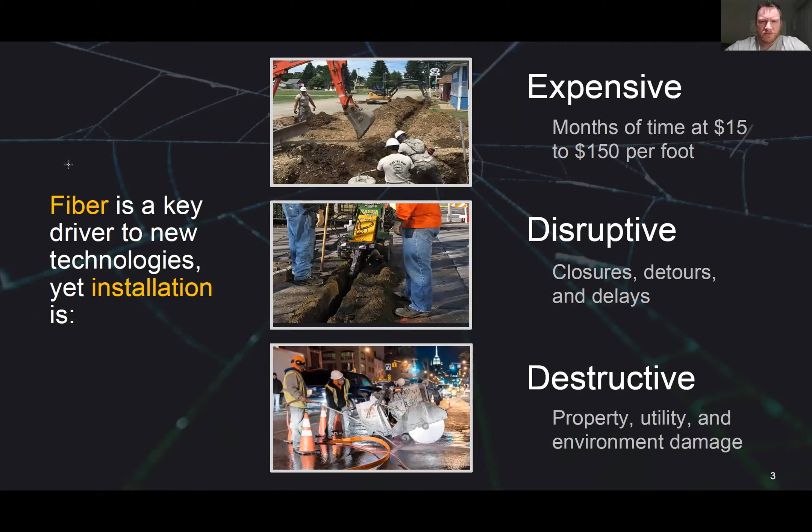So what a lot of heavy contractors do is trench the ground, or cut into paved surfaces, and the property has to be restored after the cables have been installed. This can be a very time-consuming and expensive process, and it can be damaging to underground utilities, rights of way, the environment, and even the flow of traffic and everyday life. Those are the types of things we're trying to avoid. So we developed FiberTRAX.

We're essentially painting optical fiber onto hard surfaces or paved surfaces to bring data connectivity and broadband into hard to reach areas. The hardscape surfaces, like asphalt, roads, and sidewalks, were typically the most challenging portion of a network to install, because there are a lot of underground utilities, and when you cut into the road, you really don't know what you're going to get. You can survey and do different techniques to understand what's there, but a lot of surprises happen once we cut into the road.

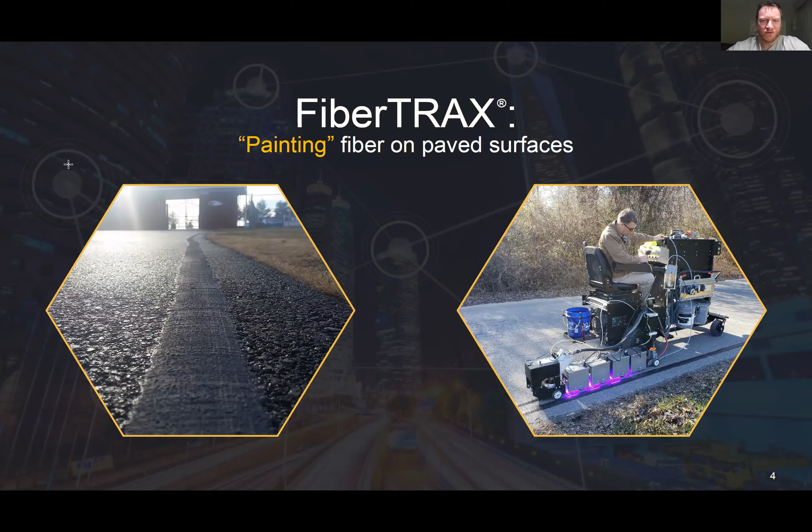So we're really trying to make it simple and easy for installers and contractors to install cable, and we're trying to get another tool in the tool bag so that when they go out to do installations, they can use this as another method, another technique. We think about it as an on-demand solution for fiber installation, where you're not cutting into the road surface, you're not having to underground locate to understand where all the utilities are. Really, you're coming out and painting a stripe onto the road that blends into the road, but the profile is pretty low, and you don't have to worry about what's underground. You can just drive across it, almost like painting onto the road network. So you can think about using the road network as a pathway instead of a challenge.

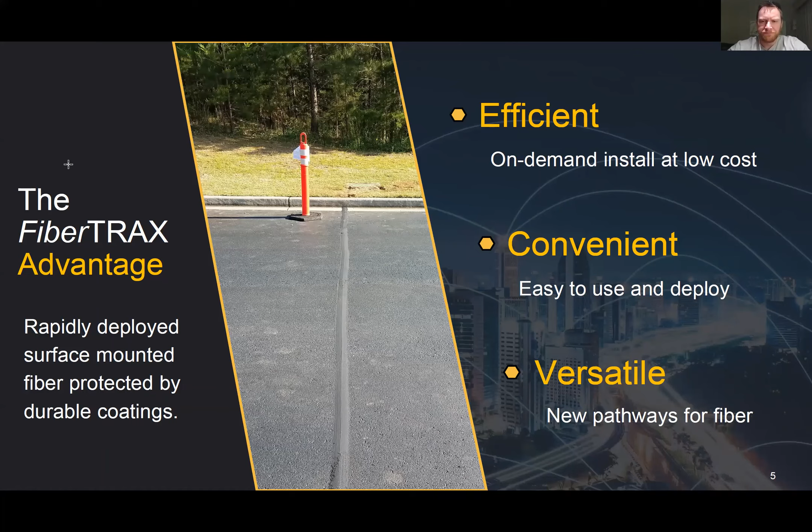We say paint, but we're not actually painting. You can imagine we're using very low profile cables and very durable protective coatings. We have a low profile cable that has 12 fibers inside, wrapped in steel armor and Kevlar, with an outer jacket to conceal everything together. Then it's adhered to the road instantly using our bond coat, which is that grayish color you see here. We also have a top coat that gives it a bit more durability and protection. Again, the idea is that it's a very low profile, so it looks like a paint line on the road, but it blends into the surface.

You could think about it like thermoplastic crosswalk intersections or heavy traffic areas where there's a slightly raised paint line off the road surface. It's not super flush, but it's slightly raised, and that's about the thickness we're working with here. It's ramped on both sides, so it's ADA compliant, even below the threshold for ADA. We put it in roads, parking lots, sidewalks, bike paths, anywhere there's a paved surface that you want to get connectivity, you can use FiberTRAX.

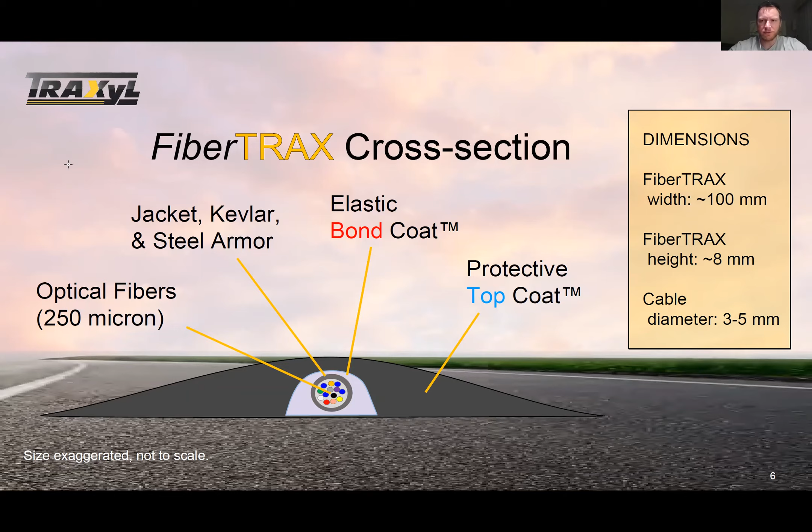Some of the conventional methods we're used to would be drilling, horizontal directional drill, boring, micro trenching, using utility poles, or even deep trenching. Utility poles aren't everywhere, and they're probably one of the least favored methods because of aesthetics and vulnerability. We think about this as a complementary method, not a silver bullet solution. It's nothing that's going to replace every type of method. We know there's always going to be a need for trenching, micro trenching, and hanging on utility poles, but the idea is, can we provide a technique that alleviates some of the challenges these other methods pose?

Even wireless, a lot of people think a wireless solution doesn't need cables, but it does transmit a wireless signal to your handhelds and wireless devices, and a lot of that technology depends on fiber backhauling that data to the middle mile or backhaul network. Even something like 5G, which we think is going to be a very big market, is going to need 10 to 15 new 5G antennas for every existing 4G antenna. While it has a faster signal and can run more data, it doesn't cover as big an area, so they're going to need more of them, and each one will require 6 fibers to backhaul all that data.

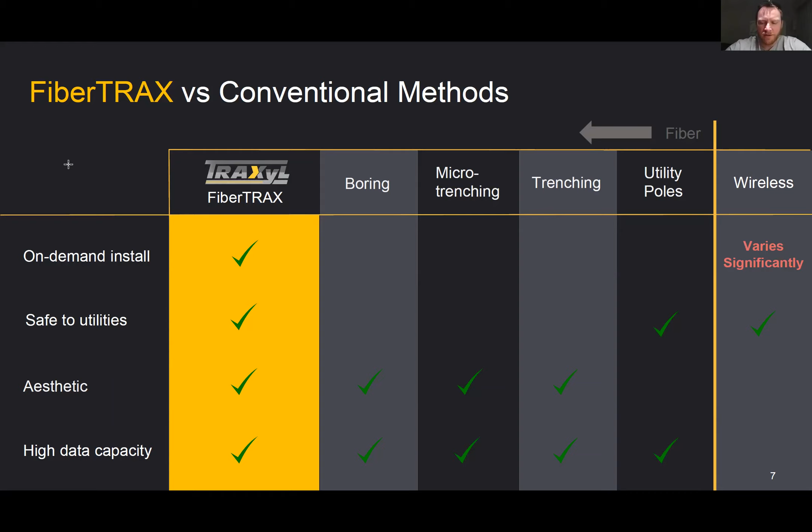Think about it: wherever you're sitting today, if you wanted to start trenching and installing a mile of cable, all the different challenges you'd run into from jurisdictions and approving authorities and permitting, and then you actually have to start construction, excavate, shut down lanes of traffic, get right of ways, and everything else that goes into that.

Think about how long and how many times we pass that same spool of cable and that same piece of trenching equipment sitting on the side of the road, building out the same network for weeks and months on end.

That's the type of schedule we want to compress. We know there's going to be design and permitting, but the process is so reduced because you're not actually impacting the road in the way a conventional method does. You're not potentially cutting up existing lines or damaging gas pipes or water mains, so that process is expedited quite a bit.

You still want to implement your junction boxes wherever they would go and design your network with expansion capabilities. But we get to avoid the excavation, backfill, and restoration of those surfaces, which in a lot of cases we've heard can outweigh the actual cost of putting cable into the ground.

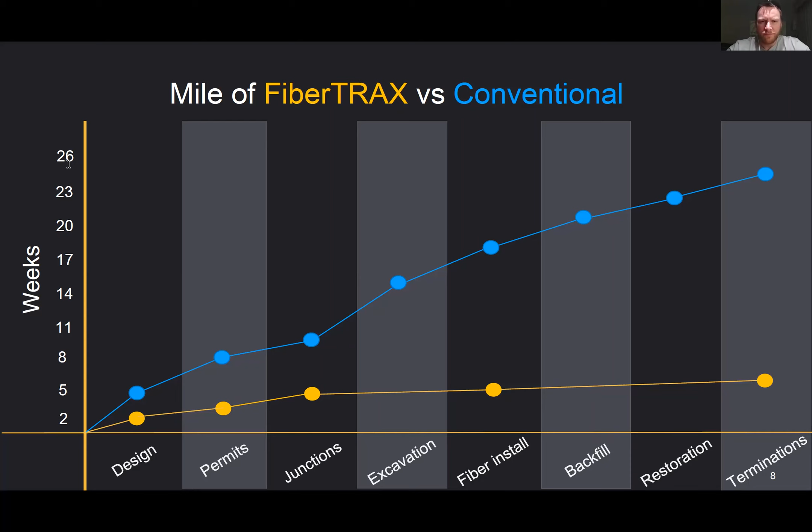We think of ourselves as a technology company, developing the tools, equipment, processes, and materials that go into what is FiberTRAX and how it's being distributed and installed.

We've been able to go out and do installations ourselves in various locations and at different times. The idea is that we want to be a technology company helping the installer. We don't necessarily want to compete for the other business, but we want to be a solution provider—building the equipment, leasing it to contractors, municipalities, or internet service providers that need it, training them and getting them certified on operating the equipment and installing FiberTRAX, and continuing to sell the fiber, coatings, and other ancillary tools and equipment that go with it.

We think about it like a printer ink model, where we're giving you a printer to go and 3D print almost a fiber cable onto the road. Then we continue to sell the protective coatings and provide the technical support.

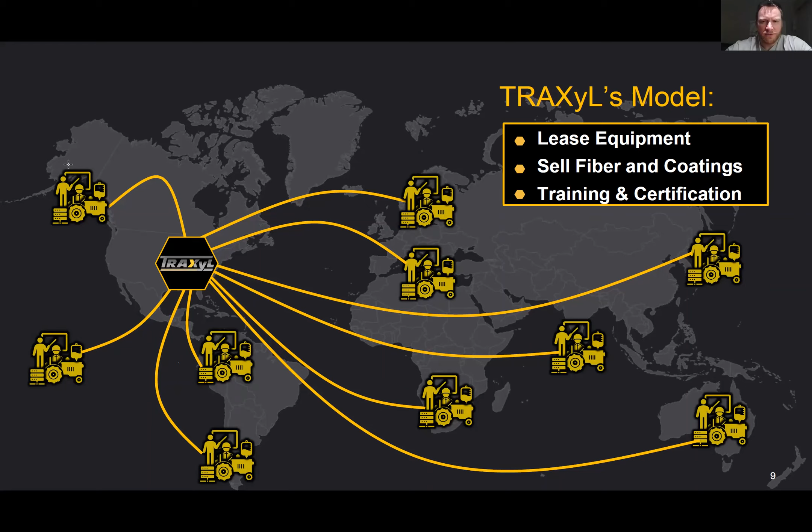So we're reaching different customers, which could be a cable installer, an ISP, a municipality, a military base, a school campus, or a residential community. There's all sorts of places where you could install FiberTRAX rapidly and on demand, and you can see the benefits and end users that could benefit from it. So those are some of the places we're looking.

Again, we're looking at last mile connectivity. We're not trying to run between DC and Philadelphia, we're trying to get all those areas in between. Those major cities, and even a lot of the middle market and small cities, have fiber that runs right through them, but they get bypassed because the return on investment wasn't enough for an installer to branch out into all those different areas. So we're trying to target that last mile network, which is traditionally 13 times more expensive than the middle and long haul networks, to reach the communities that have been on the fringe of getting high-speed internet and a robust fiber network in their community.

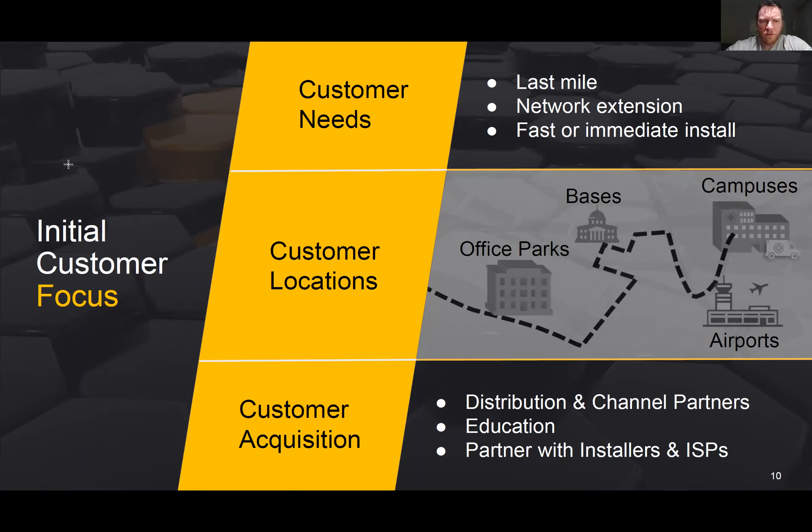We're targeting different bases, airports, campuses, office parks, schools, those types of places. We're working with different channel partners and distributors to reach those customers because they know that industry best. They've already got people having this same challenge of getting connectivity. So that's really our market and who we're trying to reach.

So Ashley, I'll pause there for just a moment to see if there's any questions in the chat, anything you might have already seen, and then I'll get into a few use cases of the FiberTRAX that we've installed.

Do we have anything yet? I don't see any questions in the chat box, but if anyone has a question so far, feel free to unmute.

Great, thank you. And Ashley, if I could just quickly ask—got a quick question. Yeah, go ahead. Hello, yeah, I'm sorry, hey, I may have missed it—what is the largest size fiber that you guys are deploying under this right now, or with this?

Sure, so currently we're installing a 12 count fiber. We've got pathways in our R&D effort to get to 24, and we think we'll be able to get to 24 by the end of this year or sooner. Also, if you want to get fiber to a location, you can run it on multiple sides of the road to double the count installed under each stripe. So if we've got 12, you can run two passes and get 24. If we get to 24, you can run two passes to get to 48. We recently did an installation in Ohio on a Department of Transportation bridge, where we did a more unique and custom installation, and we actually put 96 fibers across the bridge. We had a bit larger cable and a more custom machine, but it was a 24 count fiber cable, two cables under each stripe, and a stripe on each side of the bridge. So 24 by 4 to get to 96.

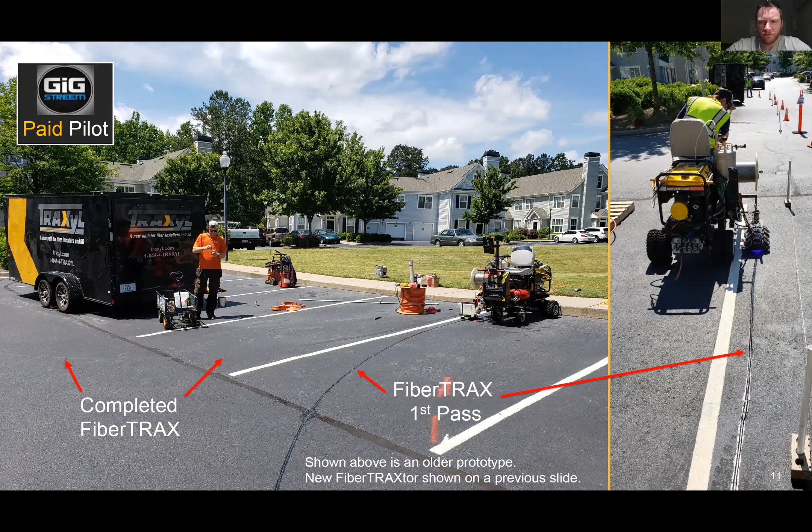Once again, the contractor was coming up to the deadline. You can imagine all the utilities that are underground at this airport, and airport authorities are notorious for being very particular in what goes into their ground. Even though this is a car rental facility, the space is still maintained and owned by, and needs approval from, the authorities at the airport.

So they called us. I think we had 17 days from the time they called us to when their contract milestone was coming up. They had been introducing TRAXyL and FiberTRAX to the authorities for a couple of weeks because they had met us through a webinar or a trade show, or heard about us somewhere. They were trying to get the approval. They called us and said, 'Can you do it?'

We came out - this was about 600 feet, and we did it in one night. We came out and surveyed it that afternoon or the day before, and then the next day we went out and installed it using our machine. The facility could not shut down their operations - they process hundreds of thousands of cars a year.

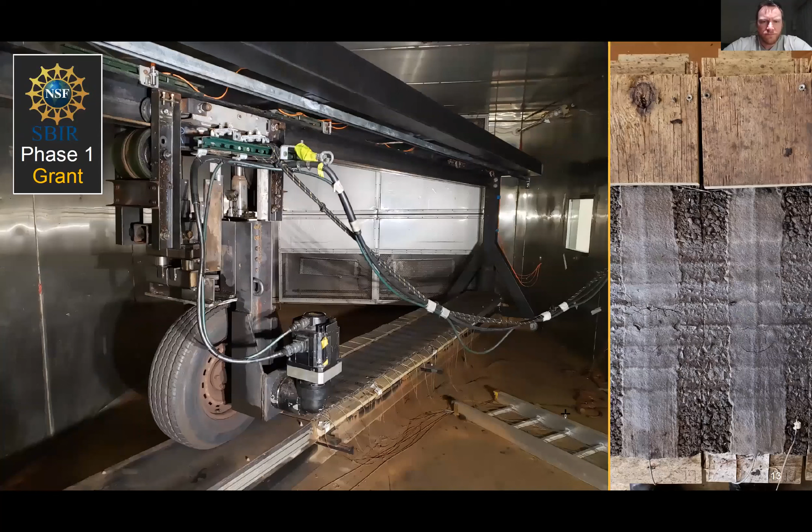We are funded partially by the National Science Foundation, where we received a grant to do a phase 1 study on the durability of our FiberTRAX. We put a bunch of different samples into an environmental chamber—4 different types, with different cable in one, a different top coat and bond coat in another, and different varieties of those. So we actually have 4 different types of FiberTRAX installation, and dozens of these samples in an environmental chamber.

This wheel is simulating a residential environment—basically the same as an F-150 weighted down with almost 1,500 pounds of pressure. It was traversing across this asphalt, which was poured to residential standards here in Virginia, then cut, and the FiberTRAX was laid.

You can see these cables coming down and out of the environmental chamber. It's being optically monitored and digitally monitored outside the chamber. We cycled the temperatures from about -30 up to 160 Fahrenheit, 0 to 100% humidity, and introduced artificial misting to create icy and wet environments, hot and dry, and cold environments.

It was quite a show, and by the time we were done with this test, the wheel ended up passing over these samples almost 700,000 times. We had failures on 3 of the family samples we put in there, which was great—that's exactly what we wanted.

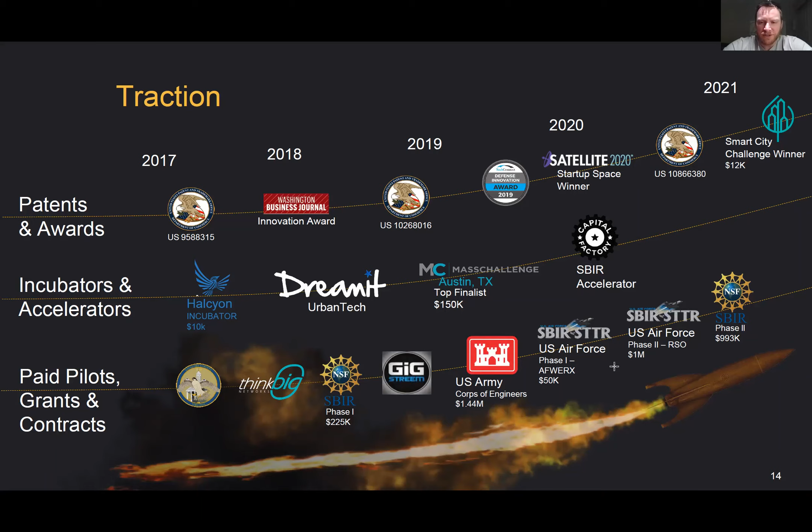I'm actually down in Vicksburg, Mississippi today with the Army Corps of Engineers. We've got a demonstration for them a little bit later as we're wrapping up that contract. But we've just been very well received in the DoD and the commercial industry, because the connectivity challenges are the same no matter where you are.

If there's a need to get connectivity, it's a challenging process. So a lot about internet connectivity and broadband, and it's even become quite exacerbated over the last 18 months because of COVID, because people have been moving to telehealth and virtual learning, remote work, teleworking, and there's just a lot of need for connectivity, and the digital divide is a real thing.

We're in Gainesville, and a lot of you know that Ashburn and the Loudoun County area is kind of a hub for fiber and all things fiber and data centers. But on the other side of the county, there are places that don't have connectivity, or they're using cell cards and paying a lot of money to get connectivity. So just where I live, the digital divide is very real. And as you get more to the center of the country, the more divided it becomes.

So we want to bring connectivity to a lot of people. There's a lot of different industries that can use it. One that I'll point out here that hasn't been talked about is optical sensing. If you're not familiar with that, you can actually use a fiber cable and put different electronics on the end. So you're not really using it for broadband, but you're using it to sense the environment around you, where the fiber essentially turns into a microphone where it can pick up the different vibrations around it.

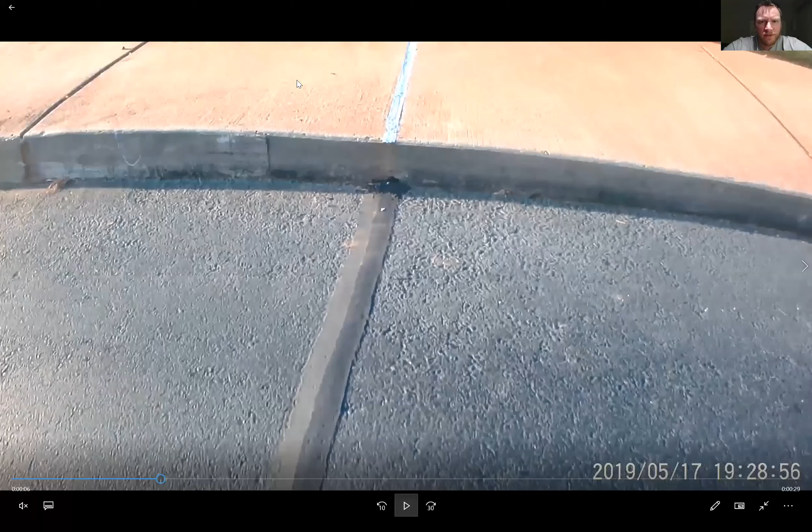Is this the first time seeing this? Yes, please. Start. Okay, over—sorry about that, my mistake.

In this video, you can see the fiber being laid down in its first pass, where you've got the fiber and the bond coat adhering it to the surface. It's cured by these lamps, where immediately it's walkable and drivable. It's protected, and then we come back with a second pass and put it right on top.

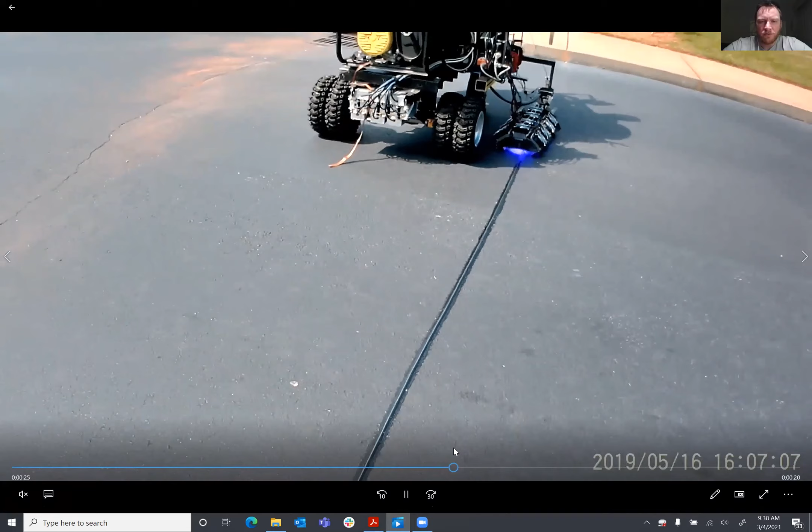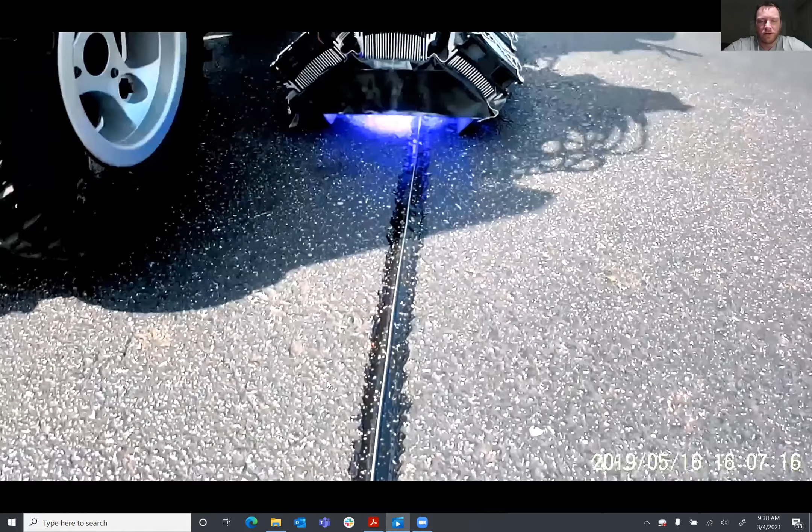This is with our first prototype, not our current machine. Again, it does about 1,000 feet an hour, and it does these two processes together that you'll see in a minute. So we come up to a curb, and I'll show you how we transition through there.

So here's the final product. It's black on asphalt, so it blends in nicely. And this is a fresh line. Once you get a bunch of cars driving over it, dirt and other debris, it blends in even better.

But you can see in this location, we didn't come up the face of the curb. We actually drilled a hole at the base of it, and then it comes out in this expansion joint, and we ran FiberTRAX across the sidewalk into the grass behind it. So we're able to go through it. It's keeping the fiber protected at all times. It's not putting any sharp bends on it.

And we're able to color match. I know it's not an exact match, but it's the color the customer chose. And once again, once you get a lot of dirt and traffic over it, it starts to blend in well anyway.

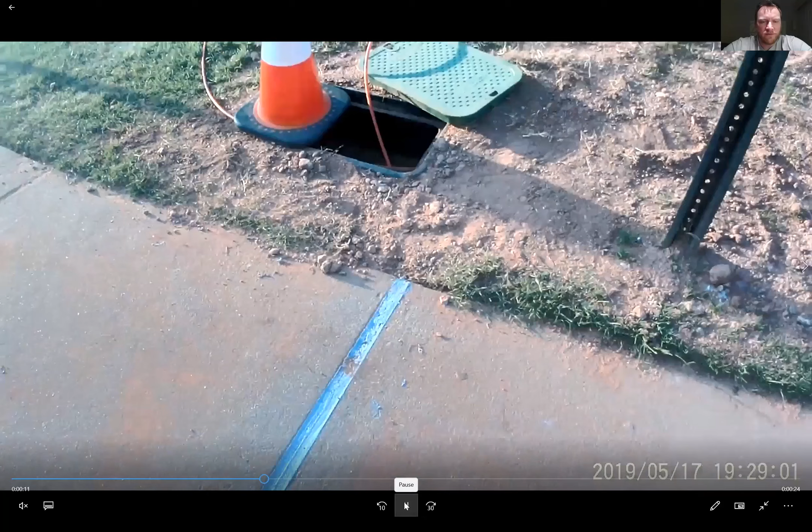So you can see we come into a traditional hand hole. We actually run another hole here. This is another transition method where we come in from the sidewalk into the soil, up into the junction box. And here is a splice enclosure, a standard off-the-shelf splice enclosure using standard off-the-shelf fiber and conduit, the microduct here.

And then you can see this area here where the contractor, the service provider, trenched to a building using a conventional method. And we met in this handhole, they spliced, and that's exactly how we made the transition. So they were able to go to the apartment complex itself.

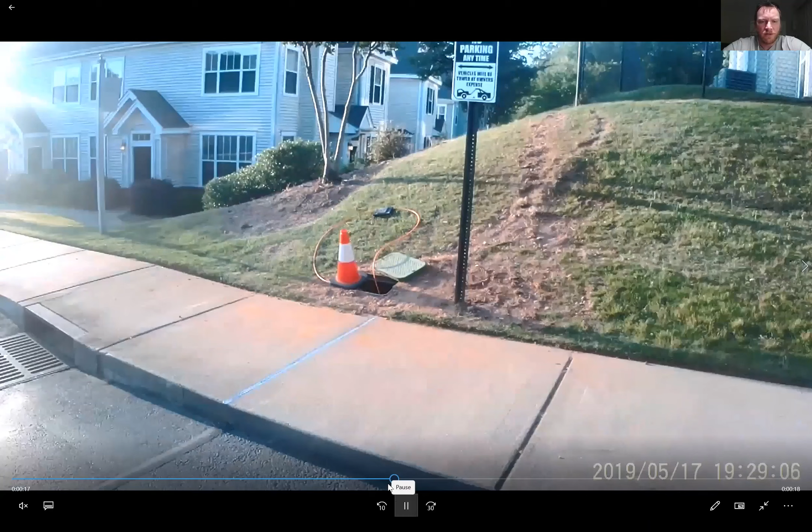And here's a finished product. So again, we did the same thing on this side. They ran a trench to the apartment building, and we met at a handhole on the other side of the curb.

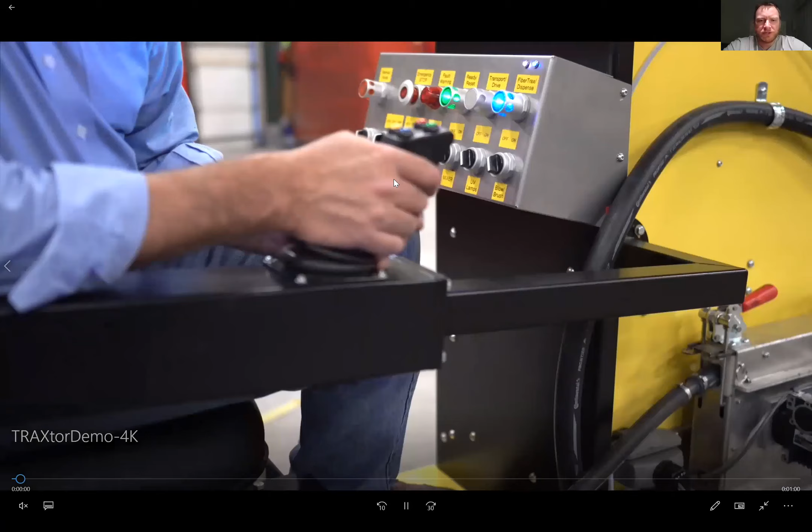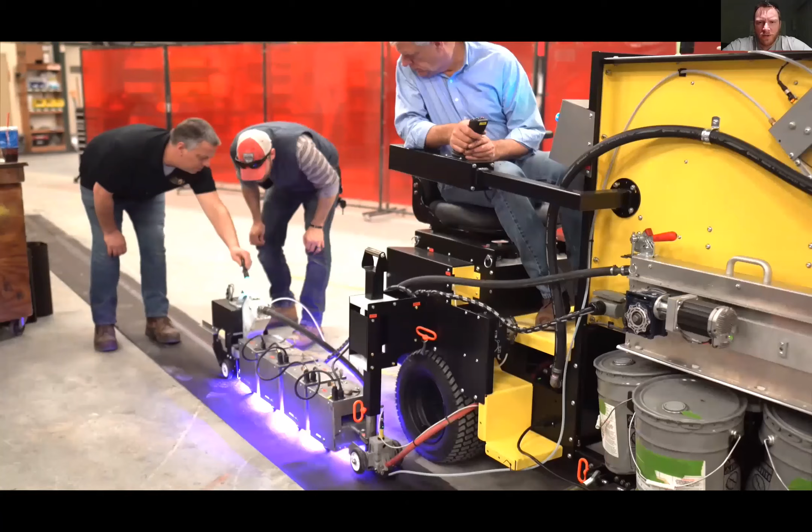The last video I will show is pretty fresh. This is our new machine that is doing two passes at the same time at our lab, or at our facility. It's still a prototype—a production prototype where we've beefed it up quite a bit.

We've still got a fiber spool that runs down to these UV lights. It cures, and right behind it in the black box is that top coat. As soon as it gets down under these lights, it's cured. It lays the top coat on top, and we're done.

And that top coat will cure in about 20 or 30 minutes, depending on ambient and surface conditions. So the warmer it is, the faster it seems to cure. The colder it is, the longer it takes. But generally, it's minutes before it's fully cured.

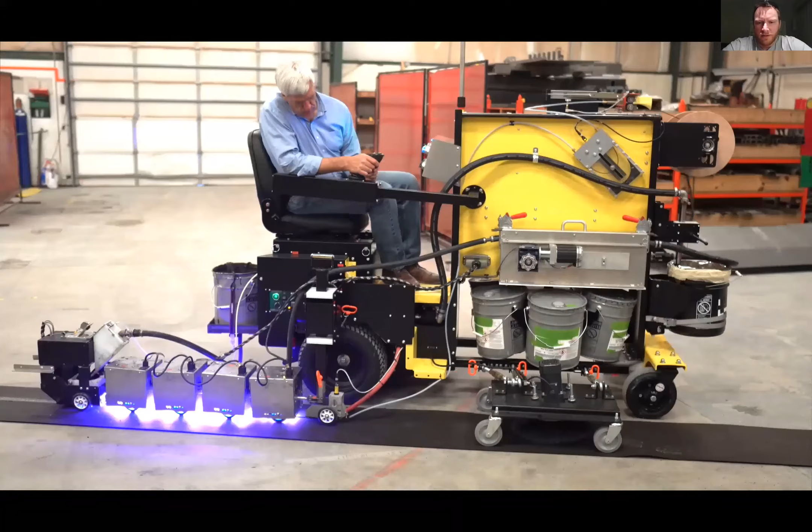We speed this up just a little bit, give you a view of the other side, and we're done. I'm going to stop talking and see if there are any questions or comments that I can address.